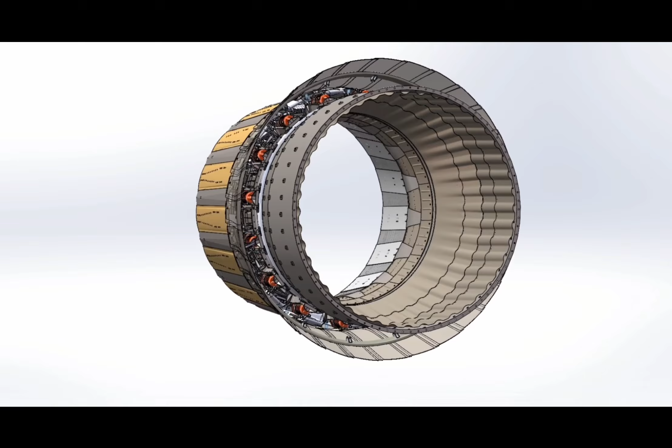As a nozzle converges, does the flow velocity always increase? What are the actual limits? Subsonic, sonic, or is supersonic flow possible?

In engineering, we typically categorize nozzles and flow speeds separately. On the hardware side, we have convergent, convergent-divergent, and variable geometry nozzles. On the flow side, we distinguish between subsonic, sonic, and supersonic regimes. However, these aren't isolated classifications. Instead, they represent a fundamental interplay between geometry and velocity.

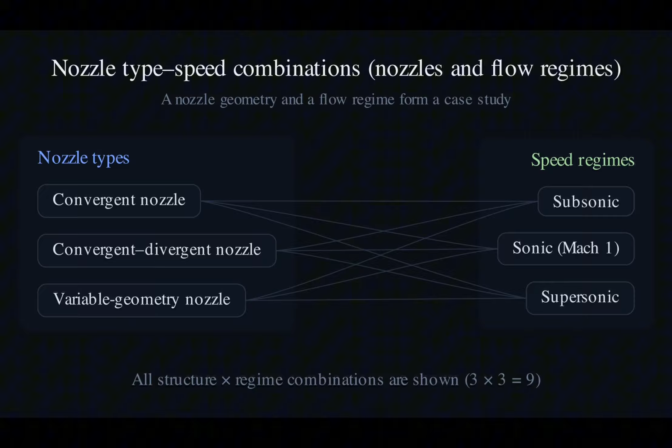In this video, we're going to focus on the simplest and most fundamental scenario: velocity changes within a convergent nozzle. So, inside a convergent nozzle, does the gas accelerate or decelerate? And what is the ultimate speed limit it can reach?

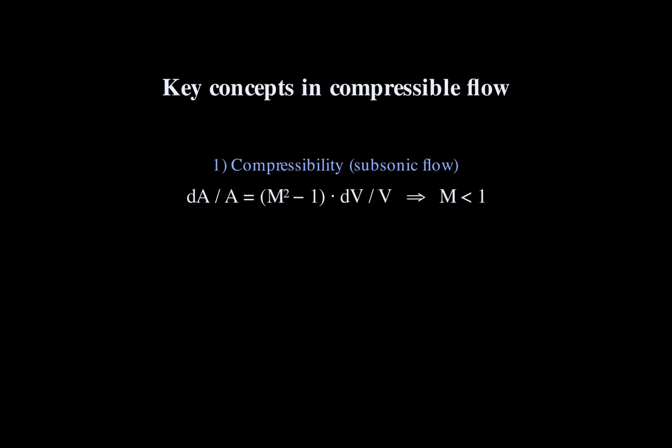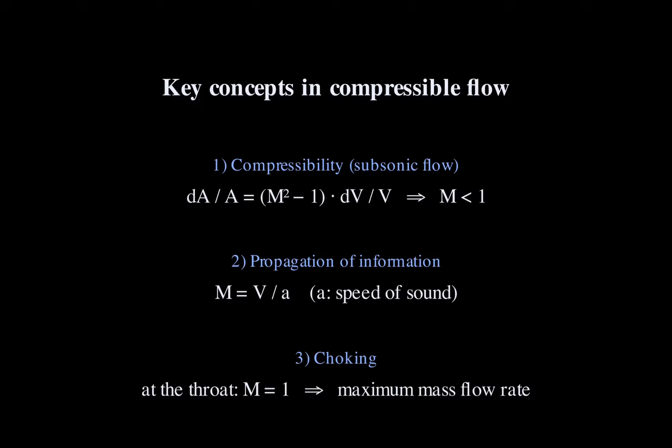To answer this, we first need to grasp three key concepts. 1. The physics of flow approaching the speed of sound. 2. How information propagates through a fluid. 3. And a crucial phenomenon known as choked flow, or choking. Once we clear these up, the velocity limit of a convergent nozzle will become crystal clear.

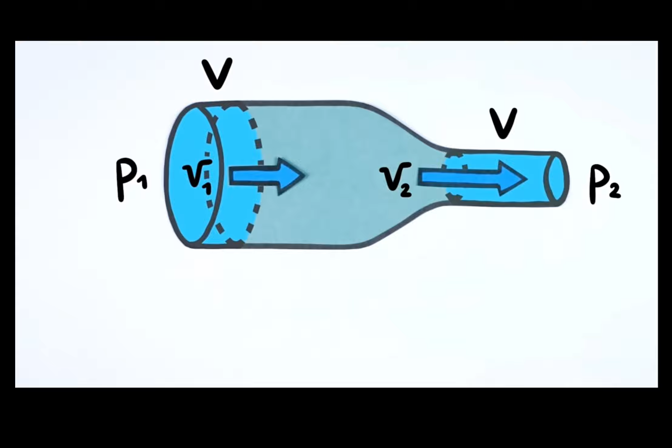First, let's look at the physical laws governing fluid behavior as it approaches the speed of sound. Before we dive into near-sonic flow, we often start with a very familiar theory, Bernoulli's principle. You can think of Bernoulli's equation as a result of the Navier-Stokes equations under extremely simplified conditions. It is the fundamental tool we use to understand the relationship between velocity and pressure.

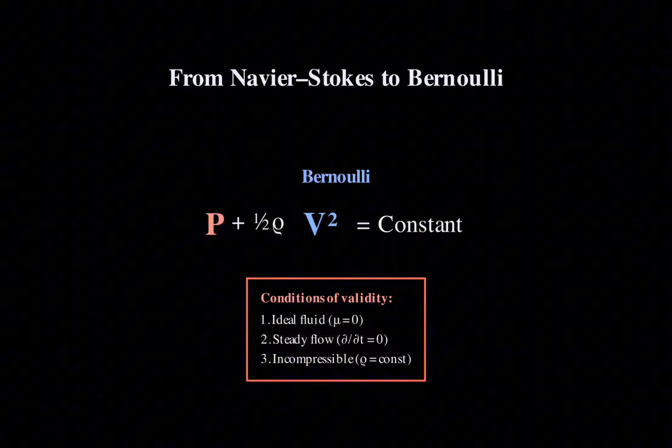However, this relationship relies on a crucial assumption. The fluid must be incompressible, or at least changes in density must be negligible. This assumption holds true at low velocities, which is why Bernoulli's principle is so effective for analyzing low-speed flows. But in engineering, the more practical question is, within what velocity range does Bernoulli's principle actually remain reliable?

To answer this, we can use a basic compressible model to compare the incompressible approximation against the actual compressible results, and observe how this discrepancy grows with the Mach number. By doing this, we move beyond simply stating that Bernoulli fails. Instead, we pinpoint exactly when the error becomes non-negligible. As the flow speed approaches the speed of sound, this error amplifies rapidly.

In near-sonic nozzle flow, the fluid becomes distinctly compressible. Velocity, temperature, pressure, and density all change continuously along the nozzle's geometry. Under these conditions, the assumption of constant density collapses, rendering Bernoulli's principle inapplicable. So, what physical laws should we use to describe these changes near the speed of sound?

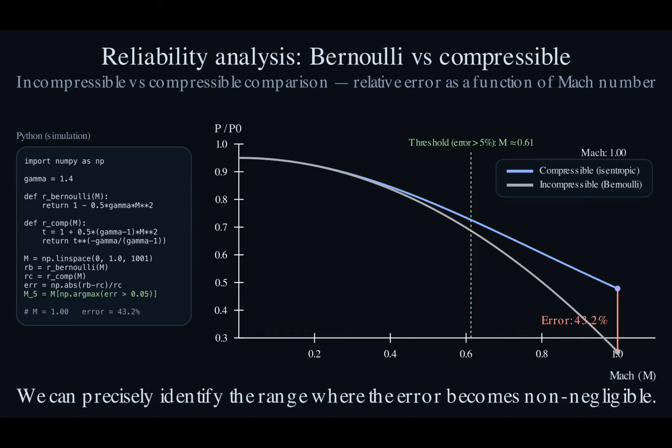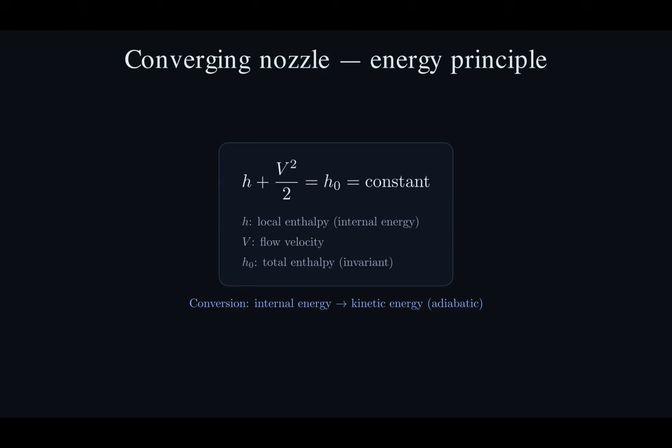The answer isn't to introduce some brand new empirical formula. Instead, we return to a more general relationship with fewer assumptions, the conservation of energy. For a one-dimensional, steady, and adiabatic nozzle flow, the true conserved quantity is not mechanical energy, but total enthalpy. This relationship reveals that the acceleration process within a nozzle is fundamentally a conversion of internal energy into kinetic energy.

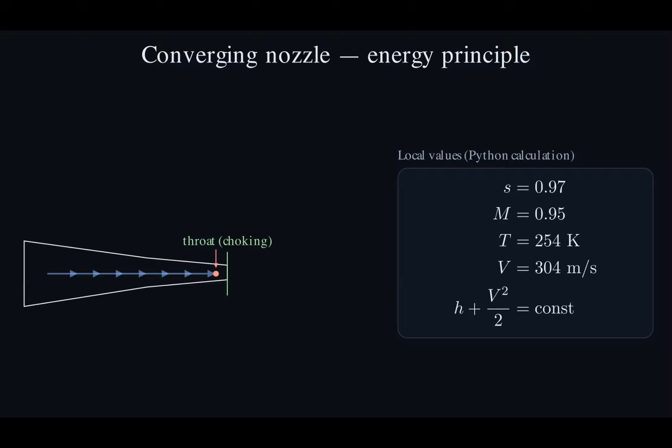It is from this relationship that temperature variation, changes in the speed of sound, and compressibility become non-negligible factors. And once the speed of sound becomes the critical reference scale, two questions determine the nozzle's ultimate speed limit. How does information propagate through the flow? And can the flow still be regulated by downstream conditions? This mechanism is the precise physical root of the choked flow phenomenon.

Now, let's talk about sound and the propagation of information. We have seen that near-sonic flow is inherently a compressible flow problem, and once a fluid is compressible, we face an unavoidable question: how are disturbances within the flow transmitted spatially? Here, information is not some abstract concept.

In fluid dynamics, it refers to very concrete physical shifts: minute changes in pressure, tiny fluctuations in density, and slight disturbances in velocity. For instance, when the pressure at the nozzle exit changes, if the flow is to respond at all, these changes must effectively propagate to the rest of the flow field.

In a gas, these minute pressure and density disturbances do not propagate instantaneously across the flow field. They travel through only one mechanism: sound waves. In other words, sound is not just some extra phenomenon or side effect in nozzle flow, it is the actual physical carrier of information within a compressible fluid.

In subsonic flow, the fluid velocity v is lower than the speed of sound a. As the velocity within the nozzle continues to increase, the fluid begins to catch up with the sound waves. For information attempting to travel upstream, its effective propagation speed is a - v. When v is small, this difference is large, allowing the flow field to adjust rapidly.

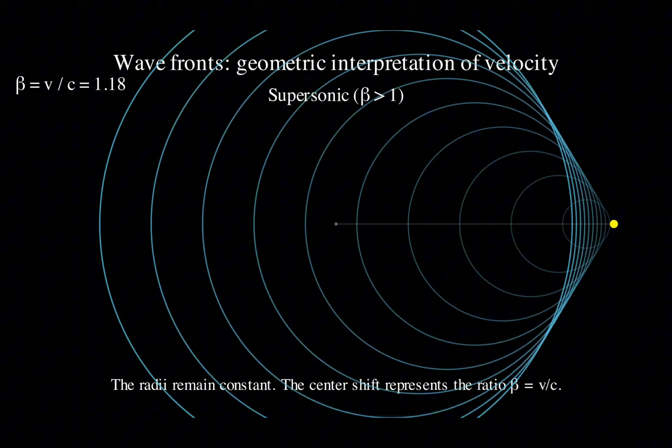But as v approaches a, the term a minus v diminishes, and information transfer becomes increasingly sluggish. The system is gradually losing its ability to respond to downstream changes. This means that in near-sonic flow, even if conditions at the nozzle exit change, the upstream response is merely delayed or even rendered impossible.

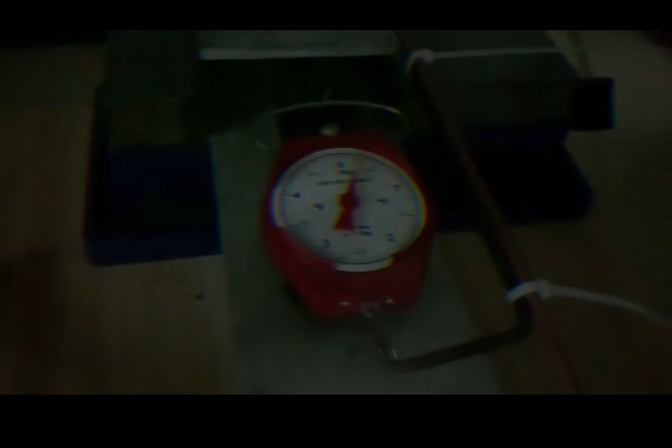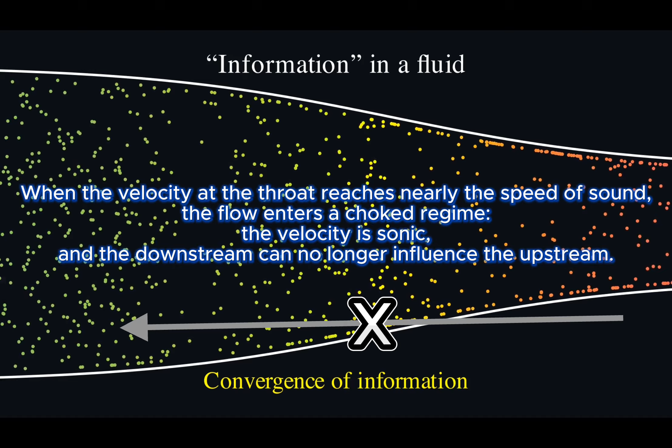At this stage, the flow's behavior is no longer determined by the nozzle as a whole. Instead, it begins to be constrained by local conditions. This marks a critical physical turning point. As the velocity increases further, reaching the speed of sound at a specific cross-section, sound waves can no longer propagate upstream at all. Physically, the downstream conditions are effectively cut off from the upstream flow. It is from this precise moment that choked flow becomes an inevitable result.

Now we arrive at the ultimate limit of a convergent nozzle. In the previous section, we saw that as flow velocity approaches the speed of sound, the flow's capacity to adjust to downstream changes diminishes rapidly. Now, let's do just one thing: return to the absolute simplest geometry, the convergent nozzle. Let's see exactly where the flow ends up under these information-constrained conditions.

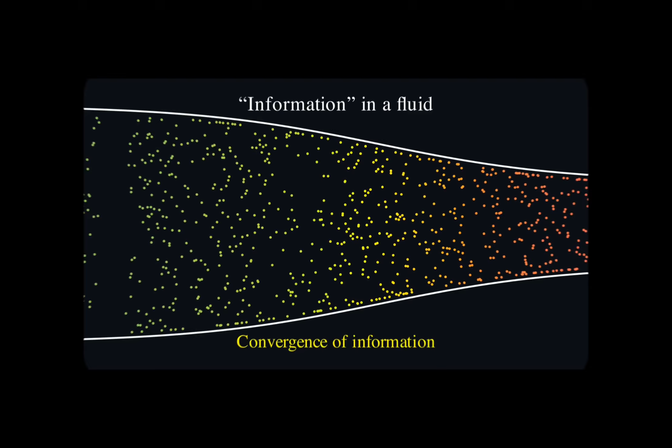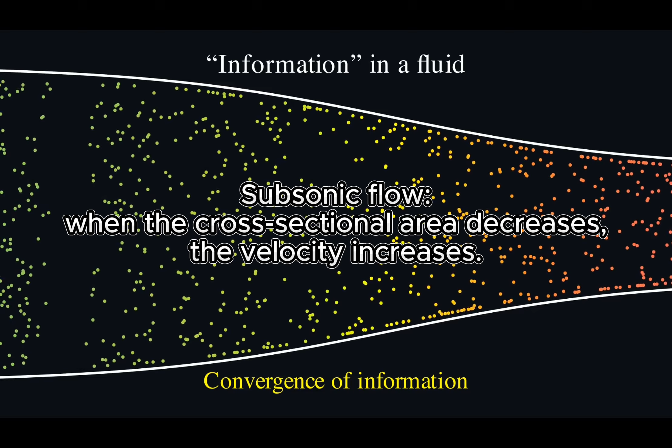Let's start with subsonic flow. In a convergent nozzle, the cross-sectional area decreases along the flow direction. For subsonic flow, this is the key rule. Reducing the area forces the velocity to increase. As long as the flow remains subsonic, sound waves can still propagate upstream. This means changes in downstream pressure can effectively influence the entire flow field.

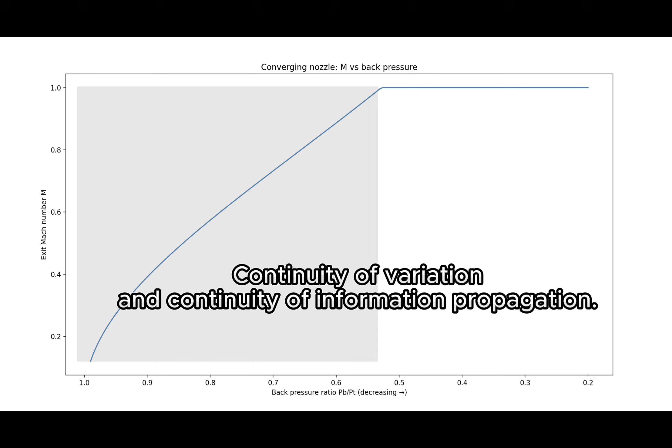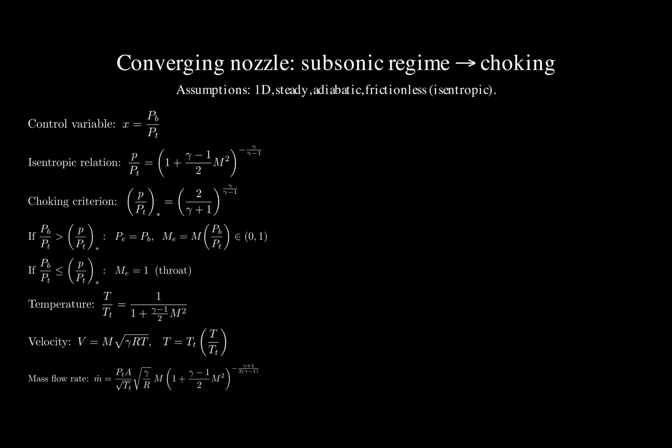At this stage, if we gradually lower the back pressure at the exit, the flow field adjusts continuously and the velocity keeps rising. From an engineering perspective, this is a smooth, controllable process. We can verify this process using a very simple computational model. By fixing the nozzle geometry and the total inlet conditions, we use Python to sweep through different exit back pressures to calculate the resulting velocity and mass flow rate.

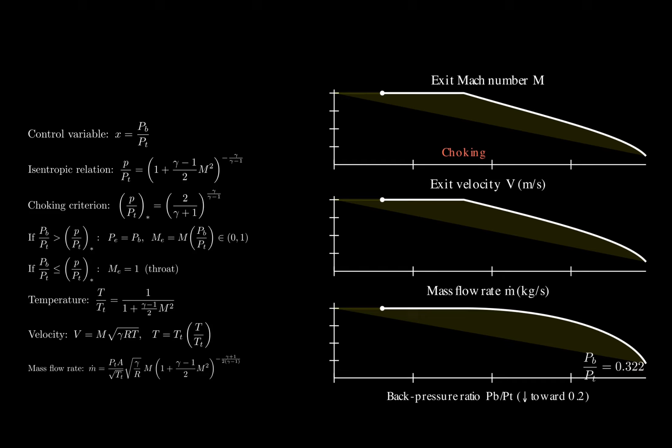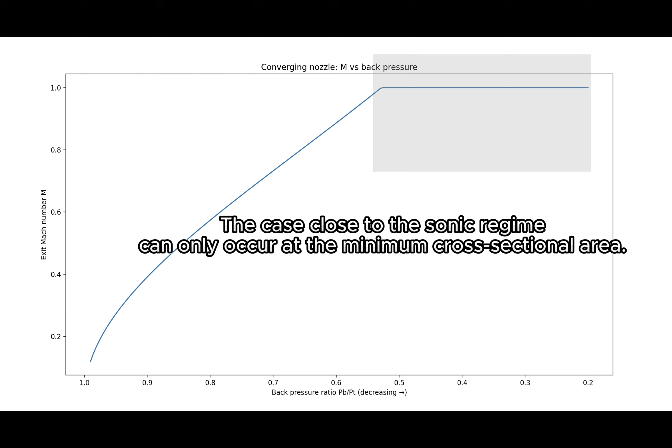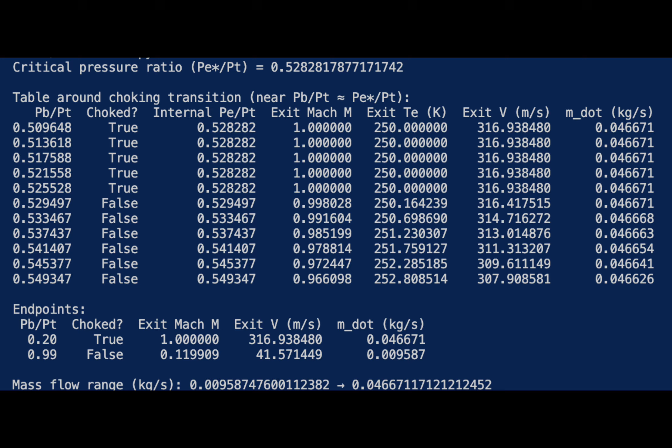In the subsonic range, you will observe a very intuitive result. The lower the back pressure, the higher the mass flow rate and velocity. The model shows no discontinuities or sudden jumps. Everything remains perfectly continuous. However, as we continue to decrease the back pressure, the flow velocity at a certain point begins to approach the speed of sound. In a convergent nozzle, this specific condition can occur at only one location: the minimum cross-sectional area, also known as the throat.

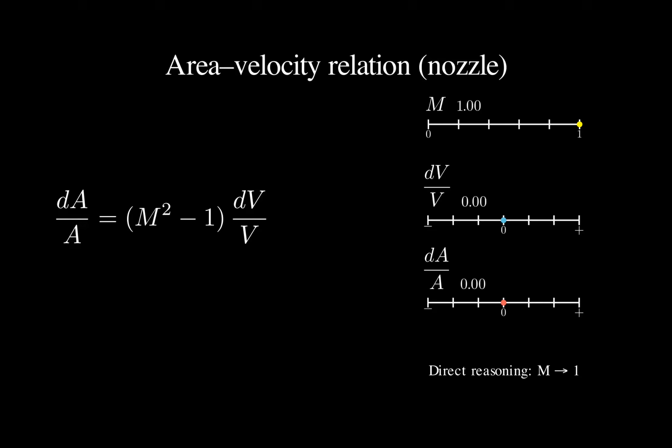In the subsonic regime, the term M²-1 is negative. Consequently, a decrease in area leads to an increase in velocity. However, as we approach the speed of sound, a mathematical constraint kicks in. For the velocity to continue changing, the change in area must approach zero. In other words, sonic velocity can only occur at an extremum of the cross-sectional area. Conversely, if the flow reaches the speed of sound, the area gradient must be flat. Therefore, in a convergent nozzle, if sonic speed is achieved at all, it must be at the point of minimum area, the nozzle exit.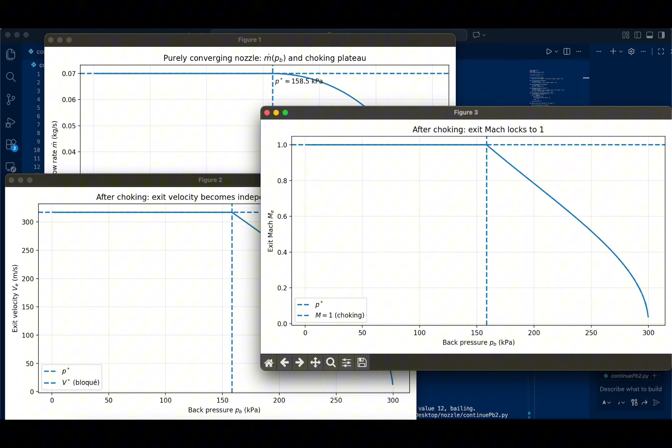If we continue the Python sweep and plot mass flow rate against back pressure, we see a distinctive pattern. Beyond a certain threshold, the curve plateaus. No matter how much you lower the back pressure, the mass flow simply refuses to increase. This limit isn't artificial, it is a result of physical constraints. This is choked flow. Crucially, choked does not mean the flow is blocked or stopped. On the contrary, the flow at the throat is sonic, and mass flow is at its maximum.

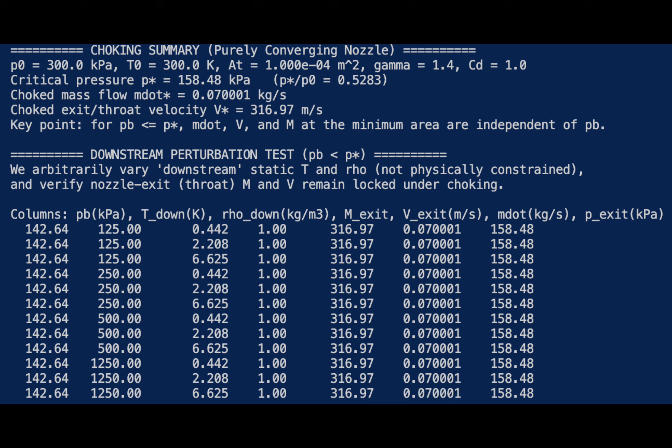What has actually changed is that downstream conditions can no longer regulate the upstream flow. In engineering terms, once choked, the mass flow depends solely on inlet conditions and the throat area, independent of the exit back pressure.

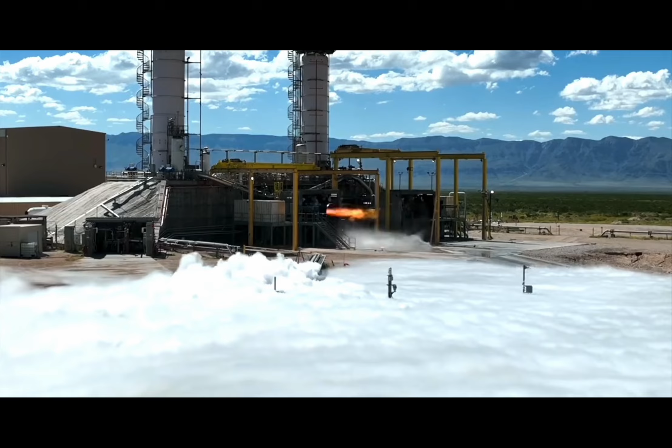But what if the incoming flow is already supersonic? In this regime, sound waves are swept entirely downstream. This means, right from the start, downstream conditions have zero influence on the upstream flow. In a convergent nozzle, such a flow is fundamentally incompatible. Instead of accelerating, the converging geometry forces the supersonic flow to decelerate. In reality, this deceleration is often accomplished through a shock wave which forcibly converts the flow back to a subsonic state. From an engineering standpoint, a convergent nozzle is simply not the right structure to handle supersonic flow.

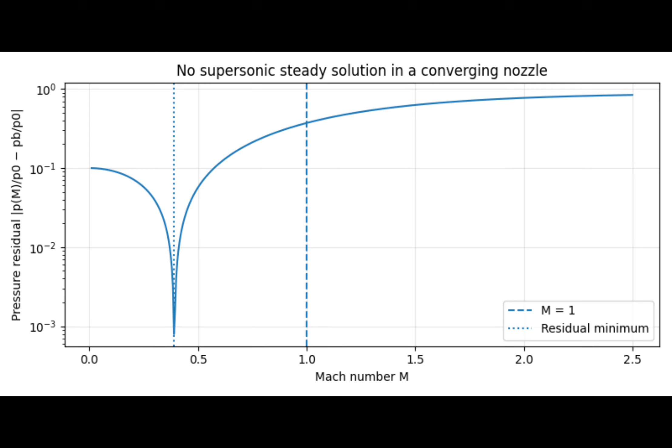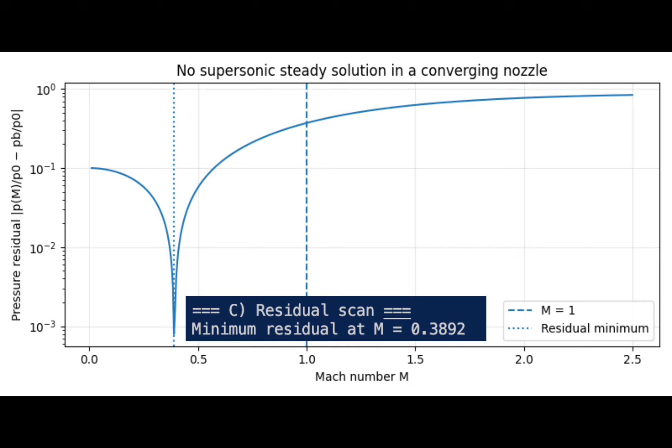This reality becomes crystal clear in our numerical model. When we attempt to force a steady supersonic solution inside a convergent nozzle, the model reacts in one of two ways. It either fails to converge, or it automatically snaps back to the subsonic branch. This isn't a numerical glitch or artifact. It happens because such a steady-state solution simply does not exist in physics. So, Python's role here isn't to generate an error or a wrong result. Instead, it acts as a tool to help us distinguish between what is mathematically possible and what is physically untenable.

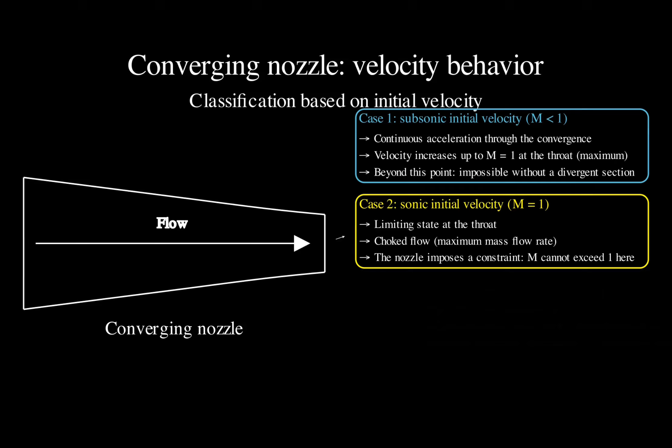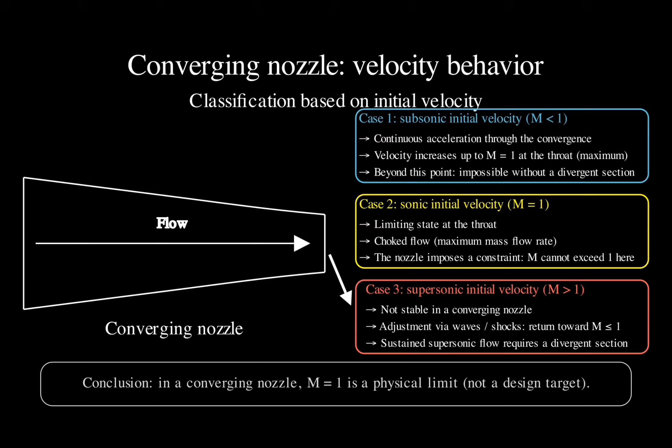Putting all these pieces together, the velocity behavior within a convergent nozzle becomes crystal clear. Subsonic flow can be accelerated continuously, but its maximum speed is capped at the speed of sound. Once that speed is reached, the flow becomes choked, and supersonic flow simply cannot exist stably within this geometry. Ultimately, sonic speed isn't just a design target. It is an insurmountable limit dictated by physical constraints.

But what if, in engineering, we do require supersonic speeds? The answer isn't to constrict further. Instead, once the speed of sound is reached, we must give the flow room to expand. Join us in the next video, where we'll discover why supersonic nozzles must be convergent-divergent and exactly how variable geometry nozzles work.